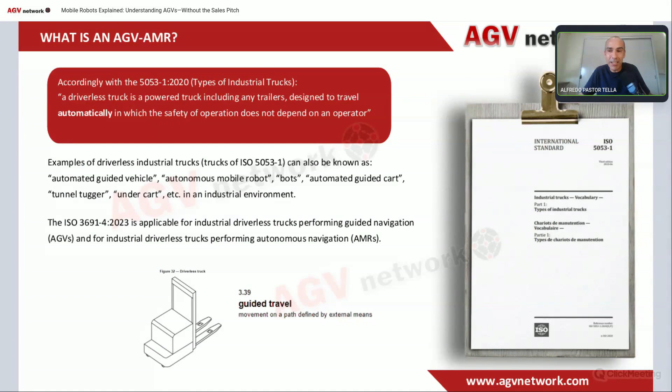Of course in the industry we say AMR is a fancier technology with autonomous behavior, whatever it is. I'm going to tell you my opinion, maybe you agree or not - it doesn't matter, because if you don't agree, just write me, tell me, and maybe you'll convince me. We are here for that, to speak about this and share some information.

So, mobile robot system - the first thing, when I go to a customer and they ask me 'I want a mobile robot, an AGV, or whatever, an AMR, whatever it is - how much is it?'

What are the things that we have to consider? There are three main things. The robots, the vehicles that are moving and performing the missions.

Physically moving pallets or whatever they move. We have a management system that is managing all the missions on the traffic, all the things we will see later on. And then we have a lot of peripherals, what I call peripherals, that are the charging stations, PLCs to communicate with the conveyor, for example, or HMI for giving missions to the robots from a manual point of view. There are many other things that are always in this mobile robot system ecosystem, and all of them are needed, not always, but are necessary to make the system work.

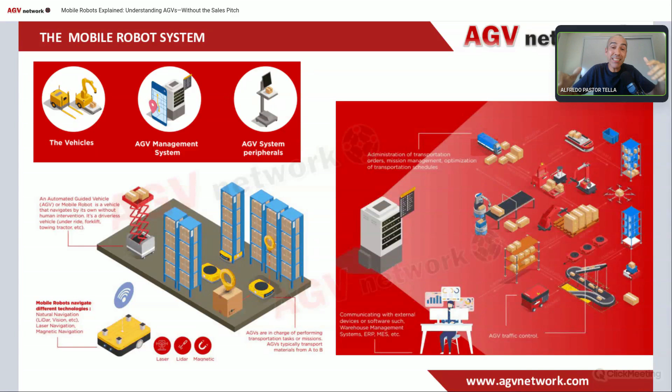So as you see, I'm staying very, very high level, very general, just to explain to you, as if you were my customer or someone that is looking for mobile robots for the very first time, what are the different things.

Let me talk about the first thing I want to talk about before talking about the types of mobile robots, the safety, and those things that are more complex.

What is the management system? The management system is typically a suite of software that we install in a host, in a computer, in a server, could be also a cloud system. So this is the brain, this software that is managing missions, the administration of transportation tasks, traffic, creating reports.

About the performance of the vehicles, it's creating alerts. You can see what the vehicles are doing, where they are. For doing this, you need some kind of graphical interface that is more or less developed by its supplier.

And then in the management system, we also have to consider the communication between the robots and the system, because typically it's via Wi-Fi with the antennas or other things. But this is more or less the main things that the management system does.

Very important, one of the main things that is taking more and more importance today is the integration with other systems in the factory or in the warehouse of the customer - ERP, WMS, conveyors, elevators, palletizers, whatever. We need to integrate our mobile robots.

The value that we are able to provide integrating mobile robots is higher if we are able to integrate with all these systems seamlessly, without problems.

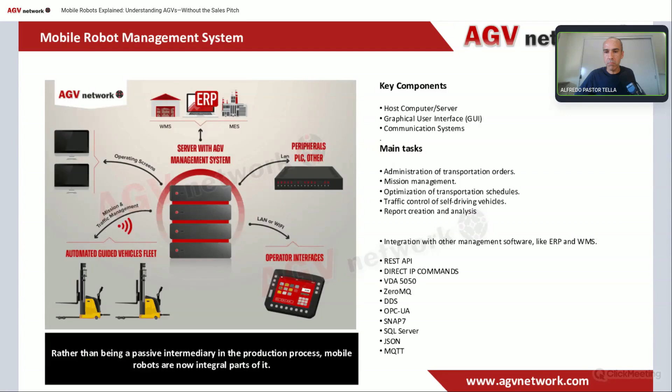What are the kinds of vehicles that we can find? We can find this kind of vehicles and this kind of vehicles. Typically, we have these categories of vehicles, which are the platforms, towing carts - it's like a platform - tuggers, tow tractors, and heavy-duty carriers. In fact, we have a lot of types, many other types. These are the more typical ones that we can see used in logistics and production.

Also for sure the forklifts, but for the forklifts I have another slide. If we come back to these vehicles, I could have a webinar about only platforms, about towing carts.

The platforms, they used to have some kind of lifting device, some kind of rollers, other things, to pick the pallets, pick the trolleys, pick whatever. Of course, each system, each customer will need one type of vehicle, because all of these vehicles have some pros and some cons, some advantages and disadvantages.

The towing cart is like a small tunnel tugger or tunnel AGV or mobile robot, that has a pin, takes a cart and goes into the lines.

Tuggers, okay, just like a small tow tractor. Then we have tow tractors with the possibility to have them in automatic mode or autonomous mode and in manual mode. And then we have this world of heavy-duty platforms that are mainly customized and could reach up to 150 tons, okay? It's very complex for me now to speak about prices.

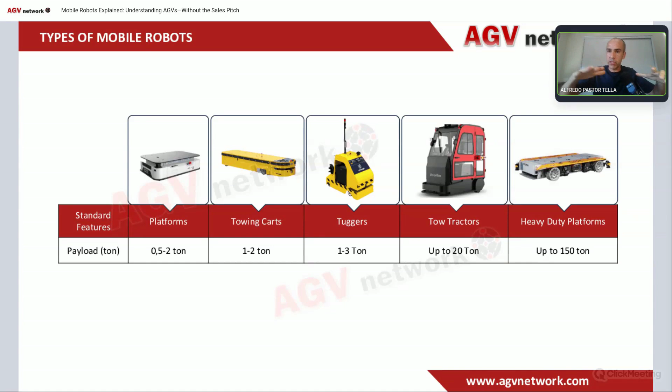This is a very easy vehicle because you can install it quite easily, since you do not need to adapt almost anything on your current flow. For example, with a kind of platform or towing cart, you should put some kind of docks to lift the pallet or whatever you are moving. With the pallet jack, it's easier.

Of course, there are other disadvantages compared to platforms. They are bigger, so the footprint is bigger, so you need more space to do the maneuvers. They are more complex to put under safety conditions because the shape is more complex, you need more devices and tools to make them safe. But this is a quite immediate vehicle to be implemented into a production site.

The stacker is the same as the pallet jack, but you have the capacity to lift it, typically up to 2.5 meters, more or less. And the counterbalance, well, you can arrive to 4 meters or even more.

Reach trucks is one of the kings of the warehouse. It's one of the vehicles that I really love because they are compact. They can move in aisles of around 3 meters, some suppliers even 2.9, 2.8, okay? And you can reach 9 meters, more or less, okay? There are also 14 meters depending on the supplier, but this is the average. Very narrow aisles of 1.6 meters, so very, very narrow. These are like mammoths, very big outside the aisles. They are a disaster because they are huge and slow, but in the aisles they are the king of going up and down and putting pallets on both sides, because you have the trilateral forks, or the telescopic forks to do it bilateral, both sides.

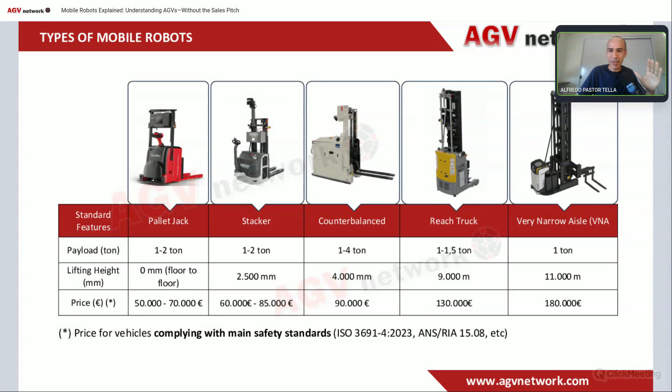Please slow down, Marty. Okay, I will try to speak slower. Sorry. That's good, that's good. I like that you tell me these things.

What are the main components, main subsystems that we can find in the vehicle? We have on average 5 systems, typically 5 systems. Maybe there's something more, but let's say about this one.

Navigation system: the system in charge of telling the mobile robot where it is and where it's going. We can have LiDAR navigation, 3D, 2D, magnetic system, visual, it doesn't matter. It's the software and devices used for identifying where the mobile robot is and where it's going.

The safety system is all the tools, devices that could be scanners, bumpers, radars, whatever, used for safety purposes, for avoiding running into people, or if that happens, making it as less harmful as possible. We have encoders, safety scanners, and the safety PLC. We will see all of this.

The power system is what puts the power into the vehicle, basically the batteries and some electronic stuff in the vehicle. We also have to consider the peripheral stuff needed, like online or offline charging, in-progress charging, wireless charging. I'll talk about this later.

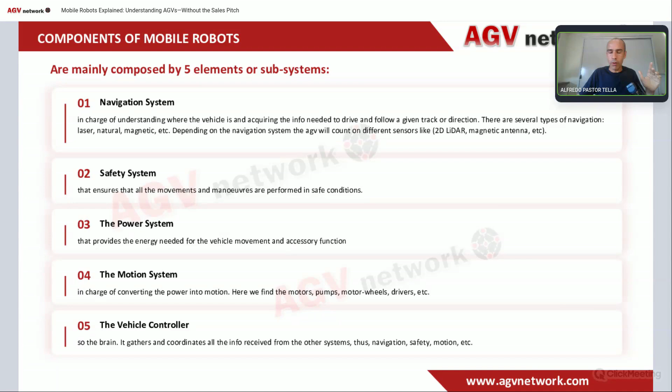Okay, let's go into navigation. We said the first thing, that AGVs have navigation systems. Today there are several types of navigation systems.

The main navigation systems that we can see in the business today are magnetic tape navigation, QR code navigation, laser triangulation (laser guided vehicles), and natural navigation. Natural could be SLAM, visual SLAM with LiDAR, 2D LiDAR, 3D LiDAR - it doesn't matter, it's natural SLAM.

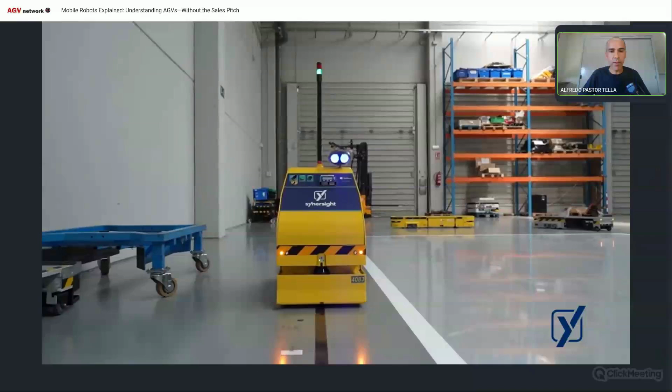So what is magnetic tape navigation? Let me show you a video. Magnetic tape navigation is a very easy kind of navigation where you take a magnetic tape, put it on the floor, and the vehicle just follows this track and does some actions, some tasks, at given points - that could be with tags or RFID, whatever. So this is the way it works.

It's very easy to install. It's complex in terms of a very complex installation with many curves, many picking and dropping positions, many things - it is time consuming. In other applications where the loop is not so complex, it's very easy because you can install 500 meters in just 1 hour, because everything is straight, going forward, and then some curves, etc. It's not so complex, even if people selling AMRs or natural navigation say it's very tricky. It's not so tricky, honestly, depending on the application of course.

What are the disadvantages? Of course there is maintenance on the track, because in my experience I have installed hundreds of kilometers, dozens of kilometers, and I can say that if you have a forklift turning on the strip, on the tape, maybe you have this problem. Otherwise there is no problem - you can wash the floor and no problem.

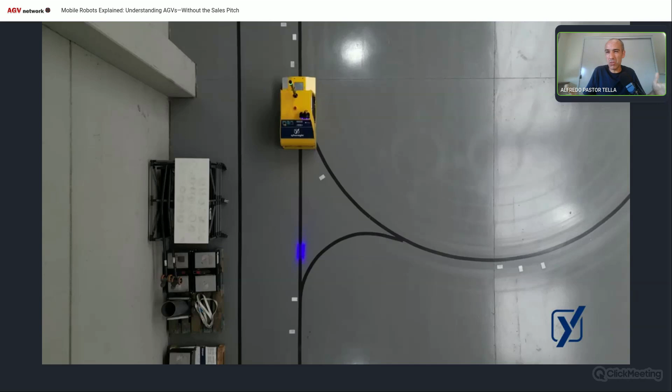So there is another problem, the cost of the tape - that is around $5 per meter. So it's not such a huge amount of money. Anyway, it has its own advantages and disadvantages.

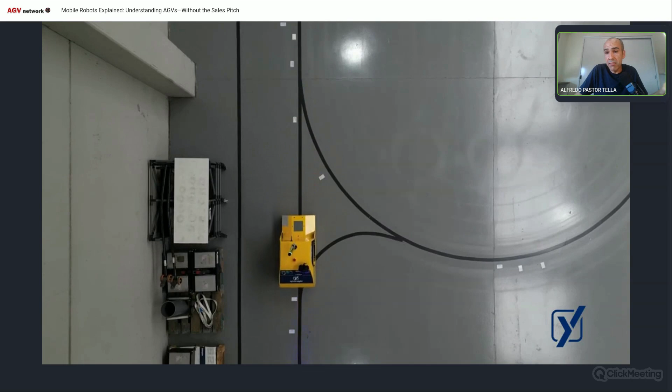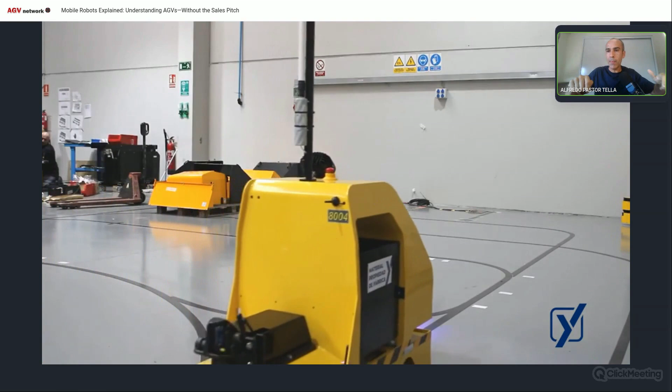One of the main advantages of course is the vehicle is relatively easy - there are no big brains inside, and that's cheaper, as we will see when we look at the cost of the vehicles. I will show you the difference between a mobile robot with natural navigation and a tow tractor like this with magnetic and with natural. There is a very important difference. Again, when we talk about natural navigation, I will tell you it's much more flexible, easy to install, easy to deploy, easy to then change the whole installation.

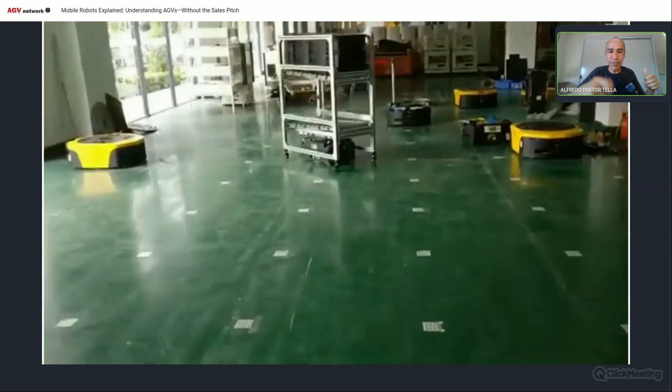Everything is true. QR code navigation: you put a grid of QR codes on the floor and give your vehicle all the missions, etc. In this case, the vehicle follows from one QR code to another, then turns and goes to another. It's the typical thing we see in e-commerce, for example - it's very used there. All these Amazon systems, likewise, many of them are using QR codes.

More or less the same problems that we have with the magnetic tape - you need some maintenance of these codes because they can get worn, torn. But they are also cheap to install, of course you have to install thousands of these. It's time consuming, not easy, but again the vehicles are much cheaper than with natural navigation.

Okay, so this is the codes. Let me see what is the next one, because I don't remember the video. You can see the vehicle is just moving 90 degrees from one QR code to the other. It's as I say, typical for the platforms.

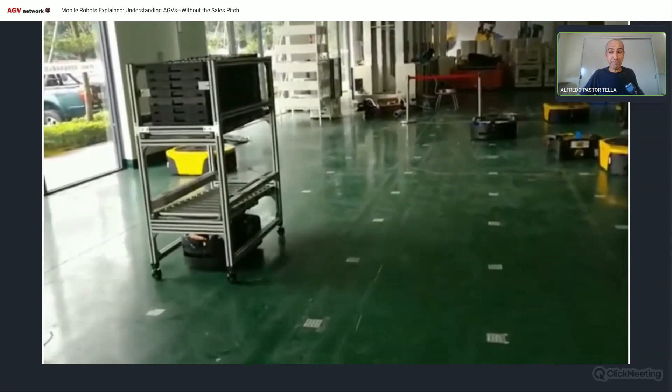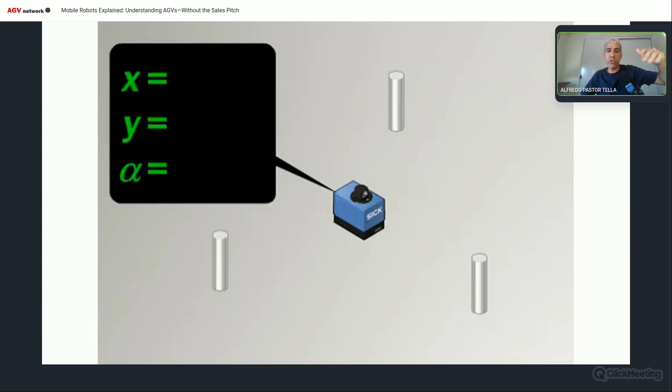Here is another one - laser-guided navigation with reflectors. So you put reflectors on the floor, or on the wall, wherever you need, and the vehicle makes this triangulation, calculates where it is depending on which reflectors it's seeing, so it knows the distance to at least three reflectors, the angle, and it knows where it is and where it's going.

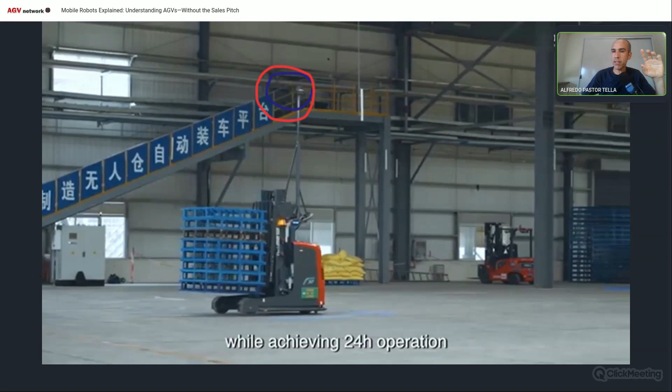For example, I have an application here, you can see this vehicle. Here you have the safety, the navigation laser, and it's targeting these things - this is a reflector, this is a reflector, this is a reflector, this is a reflector. So you need to put these reflectors. The installation is quite easy, honestly, depending also on how complex the system is, but it's not so complex.

It's very accurate, because we can reach tolerances of up to plus minus 1 millimeter for the best systems. And from an economical point of view, all the things you need to make these laser-guided vehicles work is more or less what you need for the AMR.

They are more complex to change, if you want to change the layout, the tracks, the missions. Maybe it's more complex compared to natural navigation, but it's more accurate. Someone from AMR or natural navigation might tell me theirs is 1 or 2 millimeters, but the average is around 10 millimeters. So it's 10 millimeters of accuracy compared to 1 or 2.

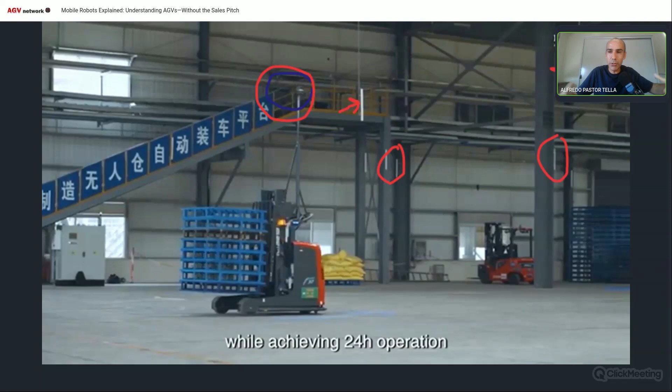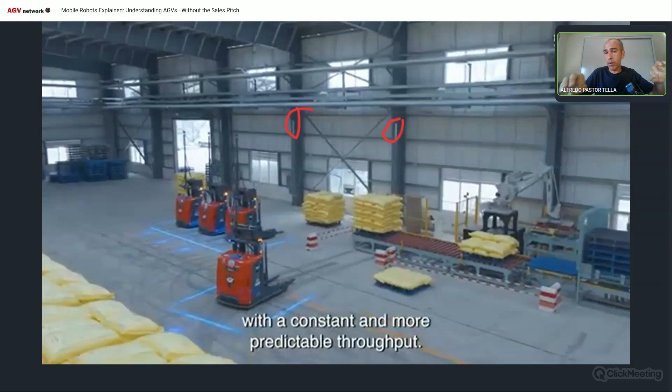Okay, so I have to remove this. Again, like here, you see the reflector. But it's quite easy to install because everything is done during the project, it's on the computer. When you arrive, you just have to put the reflectors and make a calibration of the system. That's all.

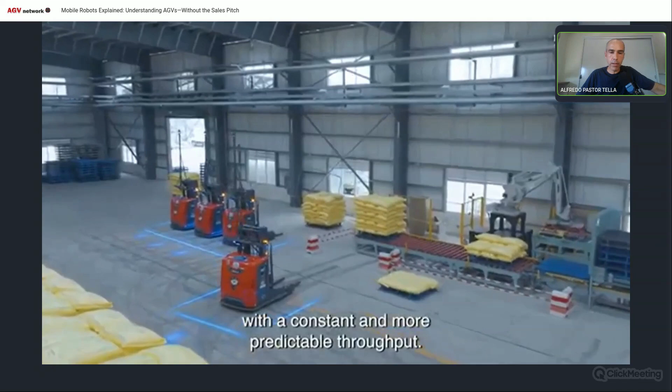After this, this is the laser navigation, as I was saying. What is the next one? Natural navigation, please. I like this. This is natural navigation, now we are going to talk about natural navigation.

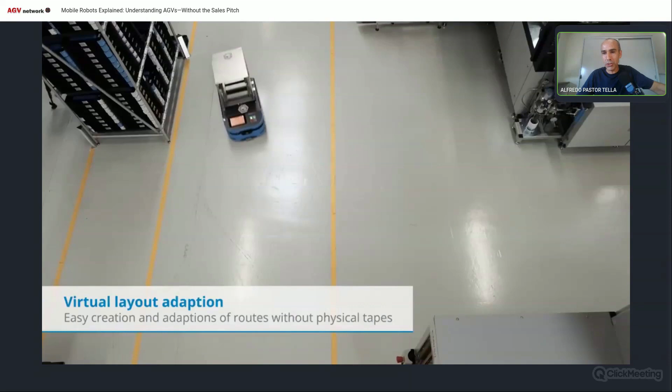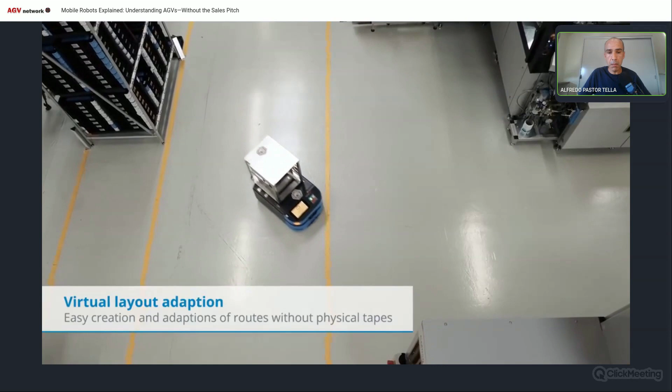In this case we have these videos. You can see this vehicle moving in the factory. As you can see, there are no references, no tape on the floor, no reflectors. What it's doing is simply watching the environment, creating a map of the environment, and localizing itself in that map, then navigating in it. That simple and that complex, very complex.

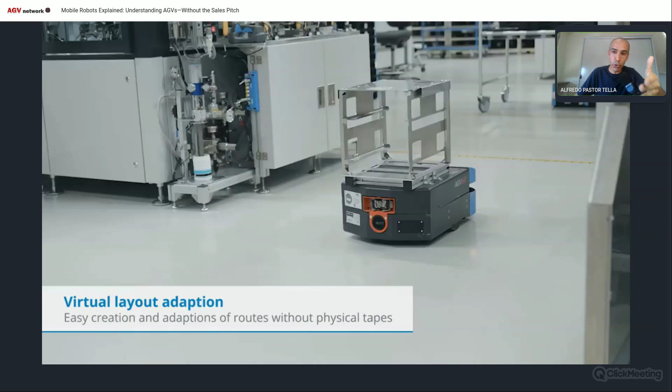This is the concept, what we call natural navigation. Under natural navigation we have a lot of technologies, the sensors, the algorithms managing all these things. Each supplier is different, so choose the right supplier. So as I said, the vehicle is moving, creating a map.

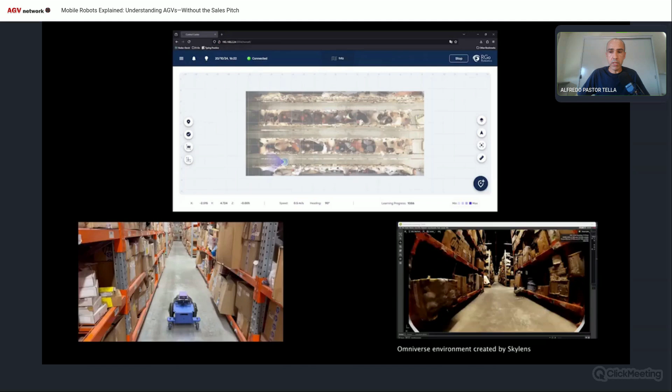These red points are what the vehicle is seeing, this is the way it knows where it is. This is another kind of natural navigation, but using visual, so cameras. The concept is the same, it's just creating a map with the cameras instead of the 2D or 3D LiDAR.

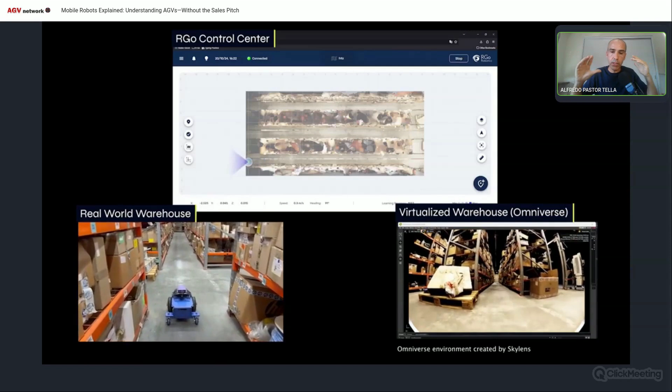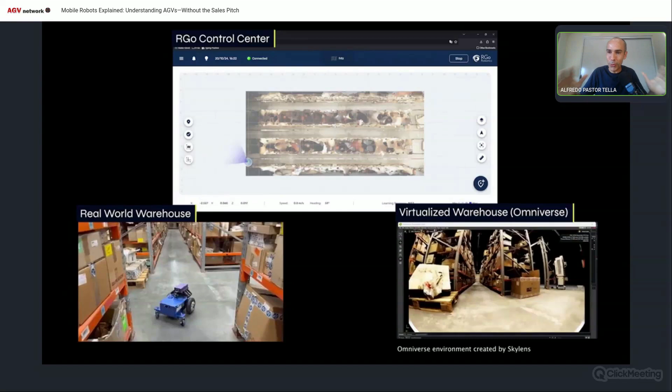It gives more data because a camera gives more data. It has other drawbacks like light conditions or other things, or the computing capacity needed to manage all this information. So, as I said, there is no worst or best. Think about what you need.

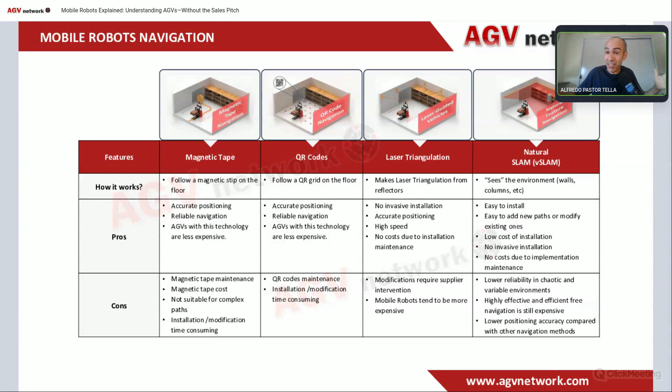Now this is the never-ending debate: what is an AGV, what is an AMR? This is my opinion, okay, but if you do not agree, just let me know. For me, it doesn't depend on the navigation. You could have an AGV or an AMR with different navigation systems.

The only thing that makes an AMR so autonomous, the only difference for me, is that it's autonomous. The vehicle decides where to go, so it's not following a track. This track could be virtual or physical. You could have programmed your system with all the tracks from a virtual point of view.

You could have navigation which is SLAM, visual SLAM, laser triangulation, whatever it is, virtual. But if your vehicle is following a line, it's an AGV for me. I call them mobile robots anyway, but okay, that's AGV for me. If your vehicle is able to decide the path on its own, that's an AMR.

For doing that, of course, you cannot do it with magnetic tape or QR code. You need to have natural navigation. Then, what kind of natural navigation? Again, that's a discussion we could have together. But AMR is only if it's able to autonomously decide what to do. Otherwise, for me, it's AGV. Let's call them mobile robots.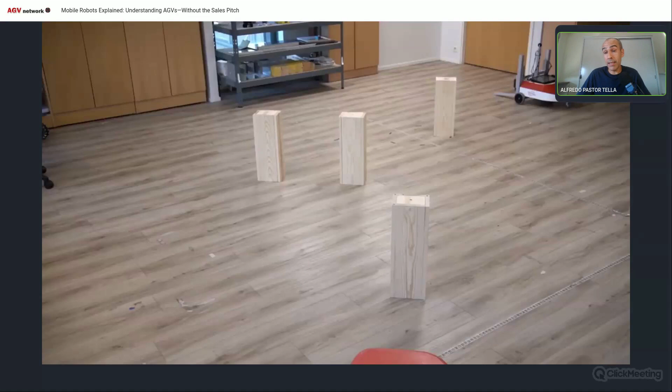Let me show you another video about obstacle avoidance, which of course AMRs have the capacity to do. And again, I'm not going to say if this is good or not, it depends on the project. In some brownfield projects with small vehicles, or with very well designed vehicles from the safety point of view, you could have obstacle avoidance. Other times it's risky.

Depends on your supplier, on your project. I'm sorry, I'm not saying you anything, I'm just saying it depends. But it's true, it depends.

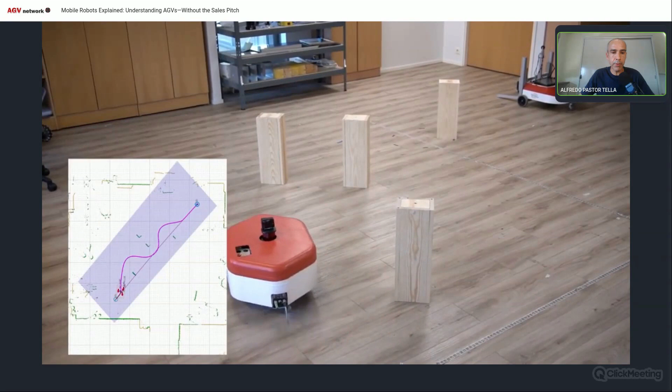Look, this is an example of autonomous behavior from Navitec. In this case, can you see... here it is, in red, okay. Here, the vehicle is seeing this obstacle. Then here it's seeing this obstacle. Here it's seeing this obstacle, and the other one is here. This is another obstacle, okay, the other obstacle.

So what is the vehicle doing? It has to go from here to here, straightforward, but there were obstacles. So what is it doing? The vehicle is just deciding where to go, and it's deciding depending on what is seen in that specific moment. So it's autonomously able to decide what to do.

This is an AMR for me, not because of the navigation. It could have a visual system, it could have SLAM, it could have 3D LiDAR, 2D LiDAR, it doesn't matter. You cannot give me a magnetic tape navigation that is free to go wherever it goes. Sorry, it's not possible.

So the vehicle is just correcting, is just deciding where to go. For example, it cannot go here because there isn't enough space. Maybe it's deciding to go here because it's the fastest way to reach this point, which is the destination. In any case, it's deciding by its own what to do.

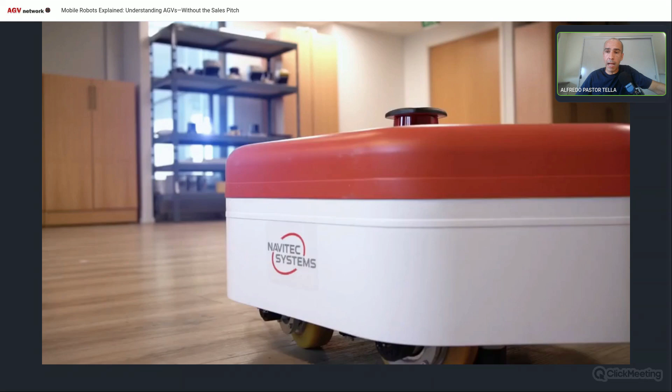This has nothing to do with safety, okay? It's just navigation. Safety is not under the natural or autonomous behavior, because safety is a system apart from the navigation. Let me check the presentation, okay, let's go ahead.

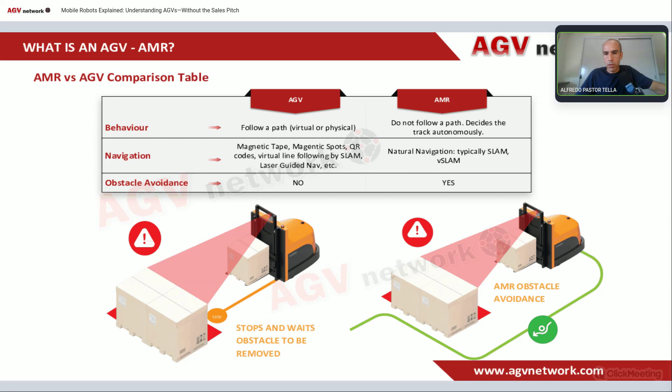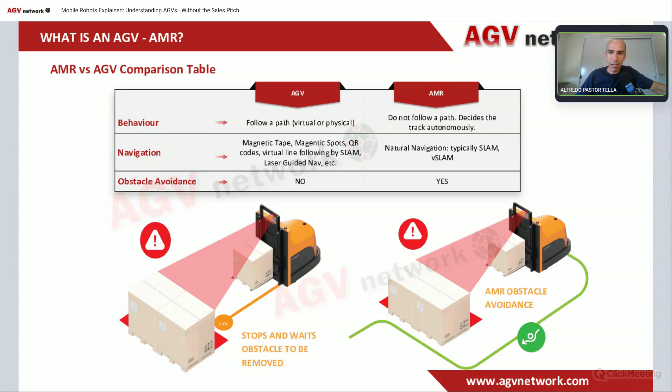Do you agree with me or not? Excuse me, because magnetic tape, yes. Okay, well, I don't see people saying that I'm not right, so that's fine.

Okay, this is one of the main slides I wanted to show you. There is not a best navigation technology, as I told you, there is not a best navigation technology. You will have a best navigation supplier, because all the suppliers could use the same sensors. Of course, choose suppliers with premium brand sensors for navigation.

But each supplier has its own algorithm, its own way to manage all the data it's receiving from the environment, from the sensors. So you have to check what your supplier is doing. Do not follow a technology. Do not follow wanting to have a SLAM system, I don't know—follow the supplier.

Go verify that the navigation is working in hard and harsh environments. The supplier has a good proven track record of successful projects, and that's the way to choose the supplier and the navigation. The capacity of suppliers to manage this data is not the same, but everyone is doing different things—the behavior of different suppliers is completely different with the same structure of devices, tools and sensors. So this is the one advice I have to give you.

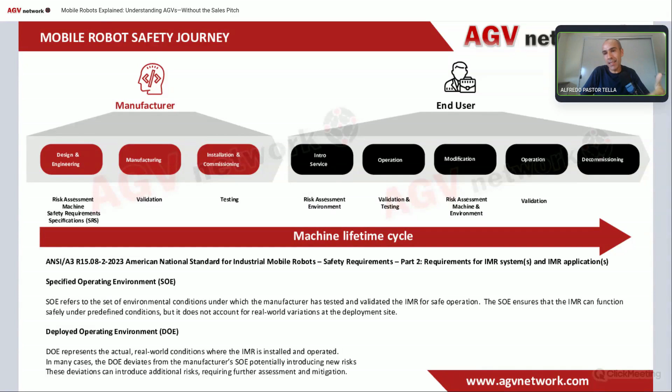So what are the main standards that we see today in the mobile robot business? There are quite two worlds, in the States...

Mainly, all the mobile robots are following, for example, the B11.0 for risk assessment, or the ANSI RIA R15.08 for industrial mobile robots, or the B56.5 for automatic guided vehicles. This is the differentiation in the States. But in any case, if you're in the States buying a mobile robot, buy with these specifications.

In Europe, we have the machinery directive that's going to become the machinery regulation in 2027, and we're following more the ISO standard, so the 3691-4:2023 that is now under review.

Why is it important to buy mobile robots with this standard? For example, in this specific case, the ISO 3691-4, because the 3691 is a C-type standard, specifically designed for mobile robots. I call them mobile robots - it's taking the whole vehicle into consideration.

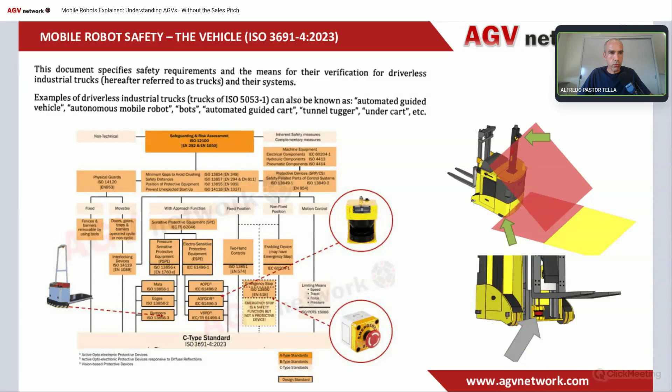How does the mobile robot system work? In the mobile robot we have safety scanner, safety encoder, safety PLC - many safety things that are safety rated. It means if a device is safety rated, it gives you a certain probability of failure.

If it is safety rated with a PLD, for example, it's telling you the possibility of failure is very low over, I don't remember, 10 years - you can check in Google. So the point is that all these standards are saying how the safety rating of each component should be.

The braking, the scanner, the bumper, the relay, the encoder, the PLC - it's very important that there is a safety chain that must be respected. It starts, for example, this scanner detecting a person, giving safely the information to the PLC, that is safely stopping the vehicle. All this has to be done in a safety loop.

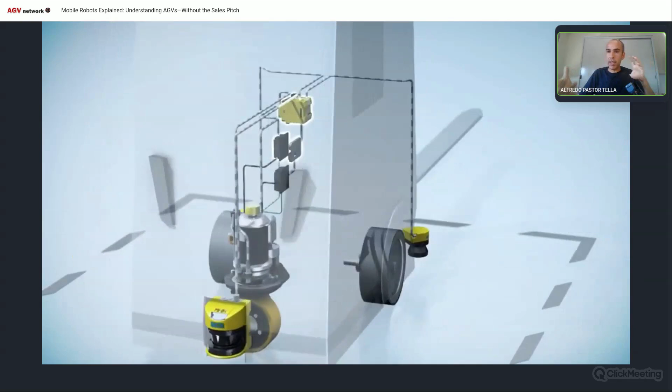Very important - check this when you're buying a mobile robot. This is a wide explanation: the safety encoder gives you the turning position of the vehicle, the speed of the vehicle, so you can program the laser scanner longer or shorter, depending on speed, depending on load. This is done by the book.

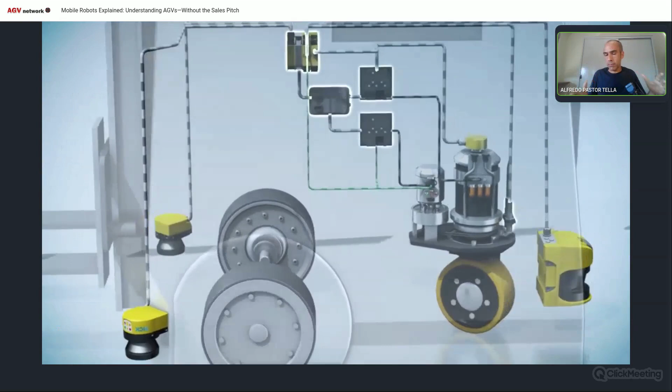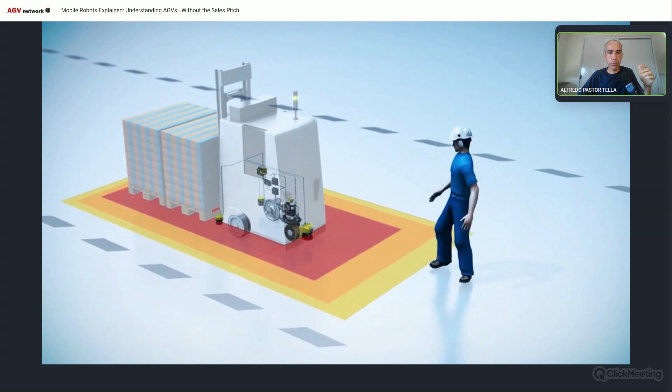Typically we have 2 or 3 safety fields that we call warning field - excuse me, guys, stop, okay, warning. It means the vehicle is detecting someone or something, is slowing down, and then we go into the red zone, which is stopping the vehicle.

The red zone is the only one considered in the standard. The other things just allow the vehicle to slow down, which is fine, but the red zone is the only thing you have to check - it's the only one considered in the standard, that's all. So the vehicle has to stop before touching anyone.

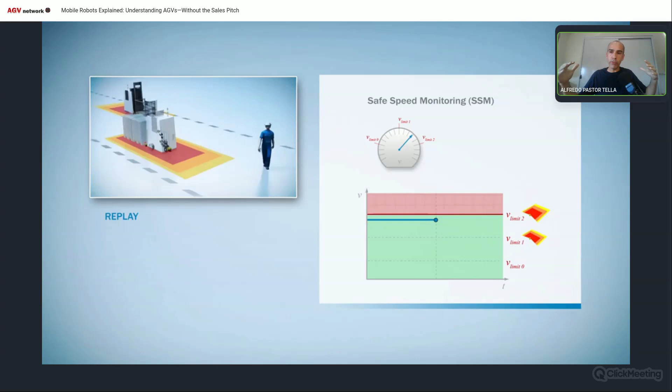The safety scanners - you can have several safety scanners because you should cover all the movement of the vehicle, so when it's turning, going forward, going backwards. For doing this, the safety scanners can be configured with different shapes.

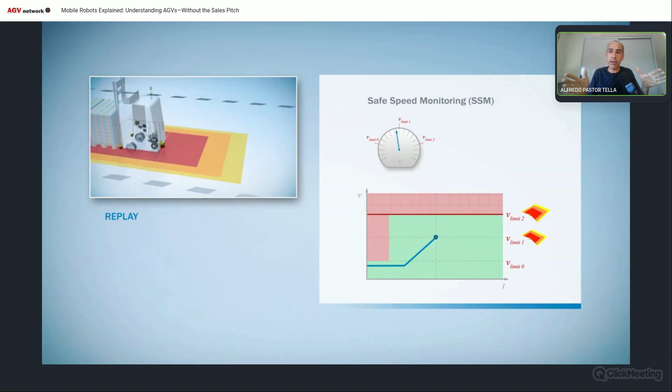You can have a look, here it is, perfect. In this case, for example, it's turning, so it's opening this side of the safety, changing the shape of the safety range to detect if there is someone or something.

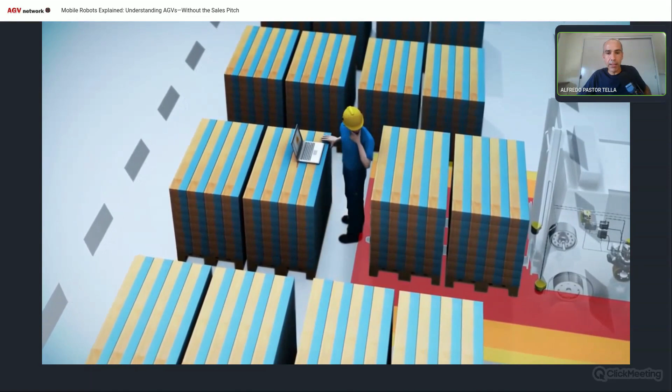In this case, there is a guy there. I don't know why he did not realize there is a vehicle going to it, but in any case, the safety scanner is detecting the person, so it stops. Very simple, of course, there is a huge amount of information behind this that we could discuss for hours and hours.

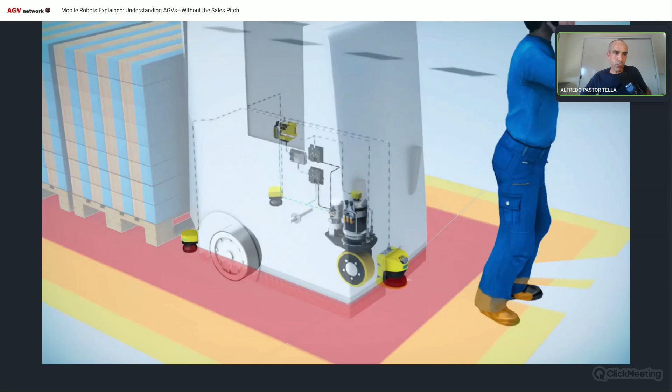Okay, let's come back to the presentation. Okay, where I am. I talked about the vehicle. The environment is not less important, it's important the same, because you have your vehicle, as I told you, but it's not said that you are installing it in a proper way.

For doing this, there are also the standards. The standards in this case are giving guidelines of how to install mobile robots. For example, the 3691 has identified several zones of operation for mobile robots, depending on factors like the speed of the vehicle, the presence of safety scanner, the presence of emergency button, the presence of clearances, the space between the person and the fixed structure.

So when there is some kind of pinch point, these distances, these clearances, these gaps, we could identify different types of operating zones. We could have operating zones, so no risk or lower risk, let's say - the vehicle maybe could run faster because it's open, you cannot pinch anyone. Maybe we have operating hazard zones, so more restricted areas, restricted zones, confined zones, and low clearance zones.

Just to give you an idea, because I cannot go into detail of each of them, what it's saying is written in the standard. An operating hazard zone is a zone, for example, of inadequate clearance, and you have to design it operating hazard zone. What does it mean?

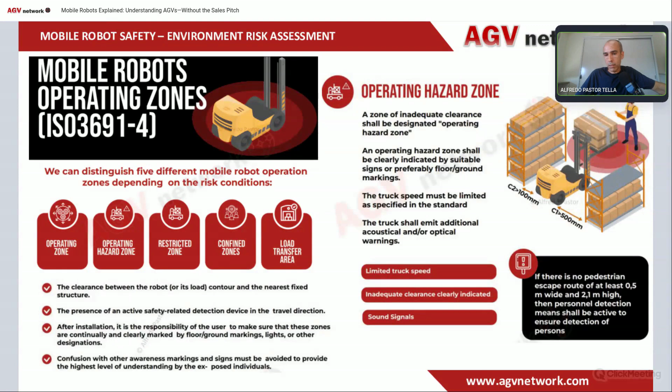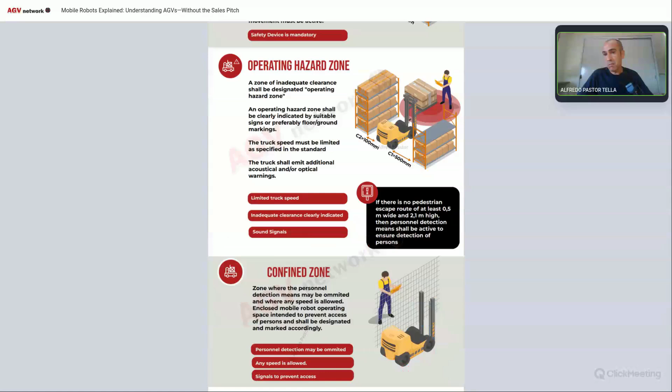But well, I'll show you this, one second. This, for example, I have created a kind of infographic explaining what are the different types of zones - confined zone, restricted zone. You can download it then on AGV Network, I will show you how.

Come back to the presentation. Sorry, but I have a lot of things to say, as you can see. It's very hard, but let's make a summary of safety, okay?

First thing that I have to tell you - if you are an end user, if you are an integrator, if you are a manufacturer, even more - buy and understand the standards. You have to buy them, go to the ISO online shop or the ANSI or the A3 or whatever, buy them, read them, understand them. If you don't understand them, ask people that understand it. You have to understand them because it's very important. If you are the end user or the integrator, you are in any case liable at a given point, responsible, let's say. Always do environmental risk assessment, okay?

You cannot put a mobile robot into operation without an environmental risk assessment following B11.0 or 12100, whatever standard you use, but you have to do this environmental risk assessment. And very important: communication between people. All the stakeholders, maintenance people, operators in the factory, integrators, even the people cleaning the floor, must know there is an automated vehicle, how it behaves, what the safety measures are, everything. So communication is a must. It's very important. We should avoid many problems if we just communicate properly between all the stakeholders.

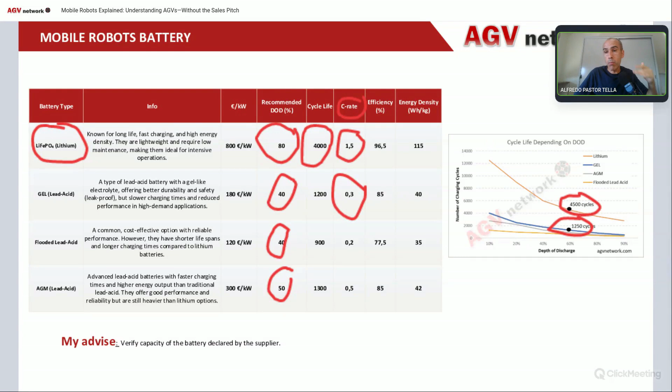So today we know we go into offline charging, opportunity charging, in-process charging. This is why, because you need to improve the availability of the vehicle, and this is why lithium is taking more and more importance in the business. But I'll show you, in some cases maybe you do not need lithium, depending on your project.

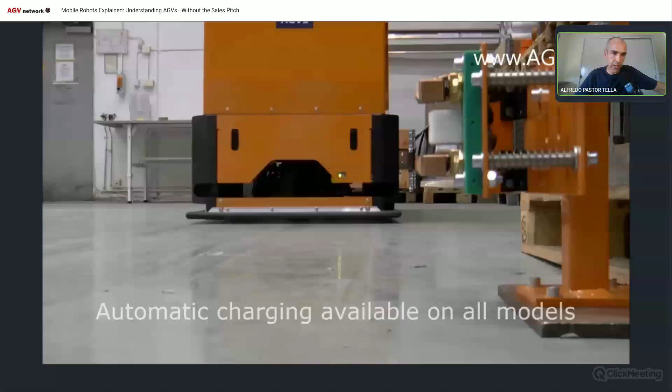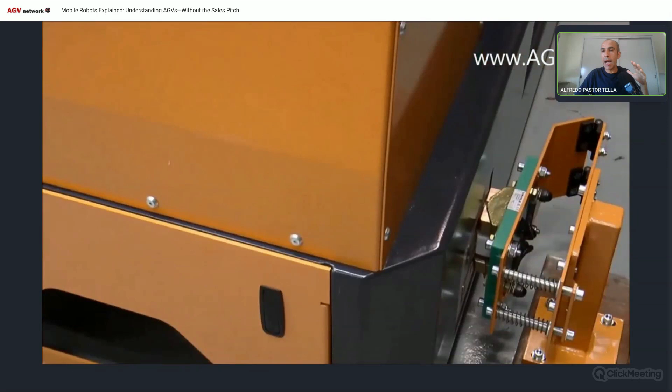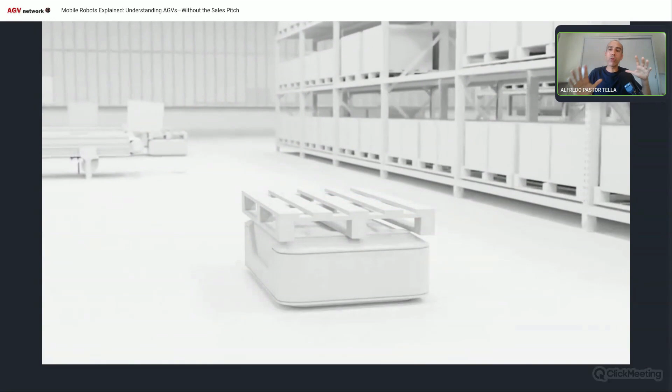I'll show you a video, okay, battery charging. For example, this is what we call offline charging. The vehicle is doing charging by its own, whenever it has idle time. So it has no missions and it goes to the charging position, does the charging, etc. It can be done with wireless charging or contact charging, it doesn't matter, but it's out of the process. The vehicle goes by itself, so the operator doesn't need to take care about it, but the vehicle has to be free.

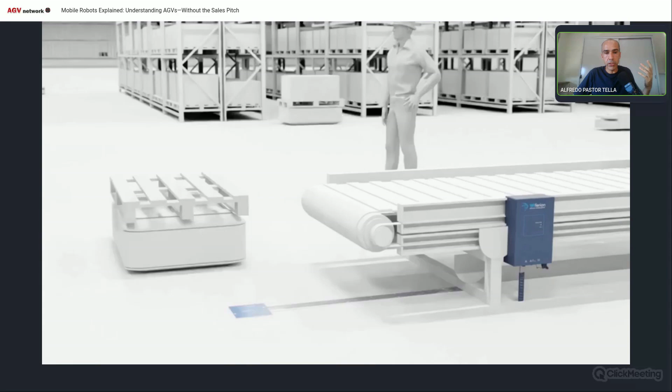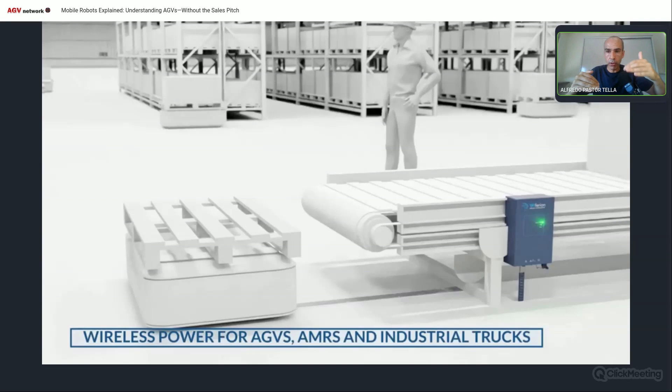On the other hand, we have another technology, which is in-process charging, so the vehicle is doing the charging within the process of the mission. In this case, for example, the AGV or mobile robot has to go to a conveyor, and there is the charging station there. In this case it's wireless charging - it's a video from Wiferion, performing this charging. Why am I showing this? Because in this kind of process, wireless charging is faster because you don't need to wait for the contacts to touch, so the flow of energy is immediate, and the charging is much faster. So the AGV, the mobile robot, is charging in the process.

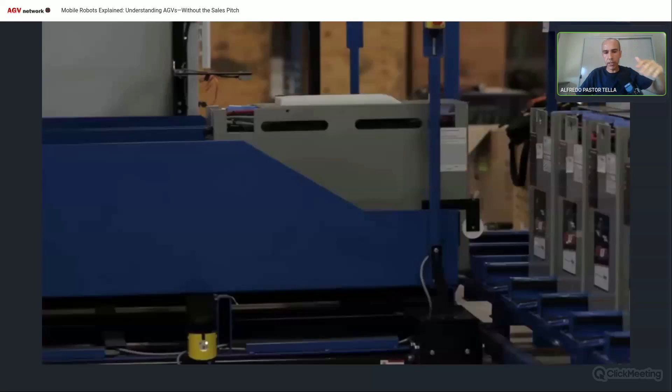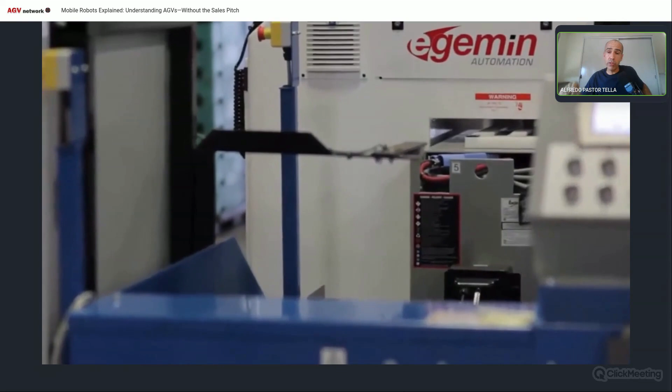You can see in this case it's wireless, so there are two coils, and it's done by induction. There are other technologies, like battery exchange, but it's very expensive if it's automatic, because this kind of device costs more than a vehicle. But it's very interesting because if you have the payback on that, the important thing is that your vehicle will always have time to work, because the battery exchange needs around 2-3 minutes, and then you have maybe one shift of work for the vehicle that never needs to stop. So you have to think about the battery - it will work, and you have almost 100% availability of the vehicle.

Of course, you need a second battery, you need the charging station, you need the exchanging machine. You can also do the battery swap manually, but of course you need a person, you need to factor in the labor cost, and then it depends on the project. What other solution do we have?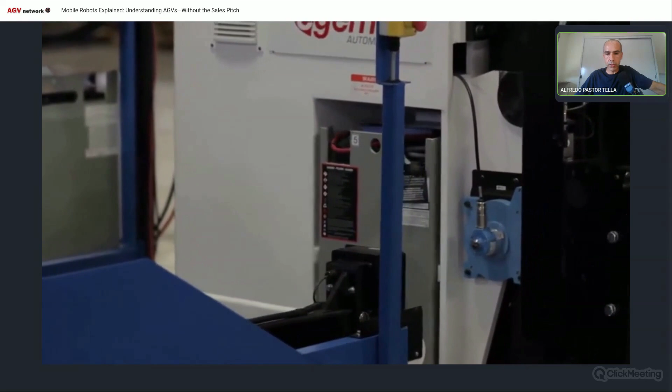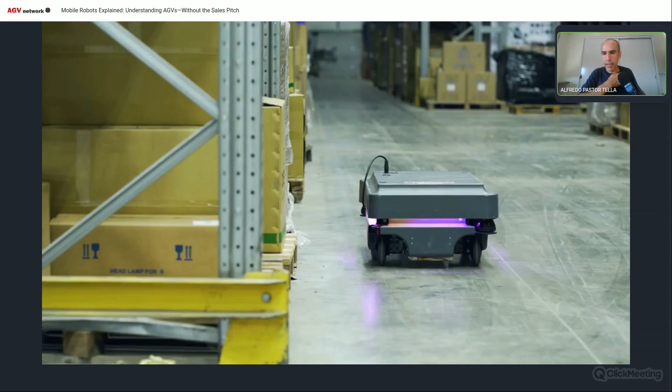Yeah, okay, this is changing the battery. I wanted to show you this because it's a new technology, from AGB - a company that is producing in-motion charging. There is a mat on the floor, and the vehicle goes on that floor and is charging while it's moving. It's a step forward from in-process charging - another way, of course it's not for all flows, not for all vehicles, but it's another possibility. You can see there the vehicle performing this charging while it is moving, which is quite innovative.

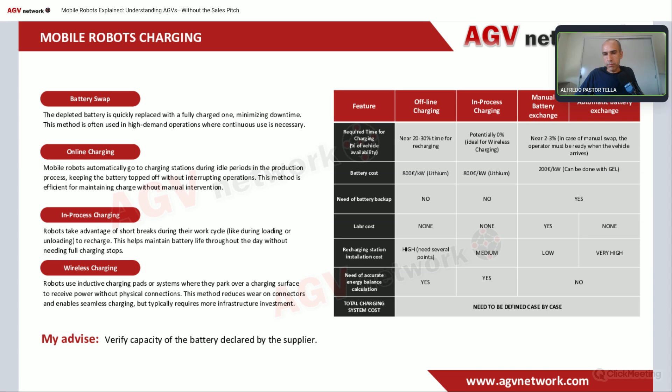There are - well, avoiding mistakes, improving traceability, more safety, better ergonomics, because if the vehicle is going into a cold condition, otherwise you'd have a person going into the cold area. Vehicles also last longer because they run smooth. There are a lot of indirect costs that are very complex to evaluate in a spreadsheet.

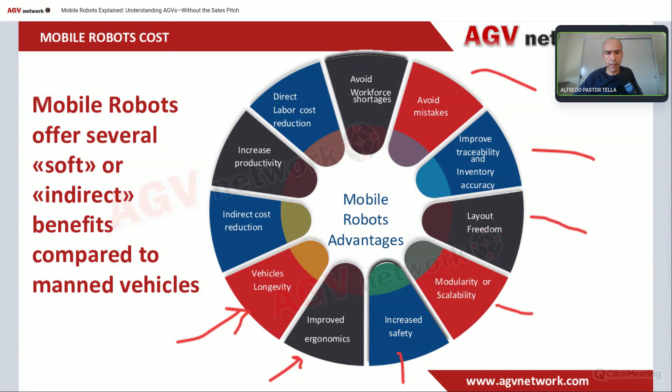If we compare the direct costs of manual forklifts versus automated or autonomous forklifts, in the manual case you have the salary of the driver. The number of shifts is very important because it determines the number of persons needed, and so the labor cost, the number of vehicles, and the maintenance.

If we look at the direct cost of mobile robots, the AGV vehicle is higher than the manual vehicle, that's clear. The number of vehicles also tends to be higher than with manual vehicles, because like it or not, they are typically slower. There is the management software, this 'brain' I told you about, that has a cost. Installation and commissioning is another cost, and the maintenance is more or less the same as manual vehicles.

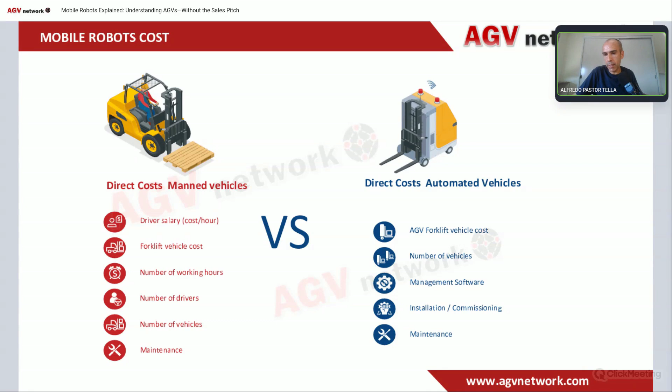So what are the main cost drivers in a mobile robot project? The number and type of vehicles, the characteristics of the vehicles, installation and commissioning cost - everything that is labor cost, like the engineer who goes there to program the vehicle and run tests. The maintenance, the software cost - this brain has a cost depending on the supplier and the complexity of the system - and other additional costs like transportation, training, and documentation, which I will show you.

If we look at the cost of the vehicles, it depends on the type - the forklift, the tugger, the platform each have different costs. Typically the main drivers are the payload. If we have a lifting device like a forklift, also the lifting capacity and the battery - the lithium battery has a cost, other types of batteries have another cost - this is for the initial investment, because if you consider the total cost of ownership, the cost may change.

And the navigation method also affects the cost, depending on the vehicle. The number of vehicles is also a cost factor, because the number of mobile robots needed is typically higher than with manual forklifts. If you take a manual forklift system with 2 vehicles, you probably need 3 automated guided vehicles. The average is 1.5 automated forklifts compared to manual. If you have 10 manual vehicles, you'll need 13 to 15 automated guided vehicles - that's the rule, more or less.

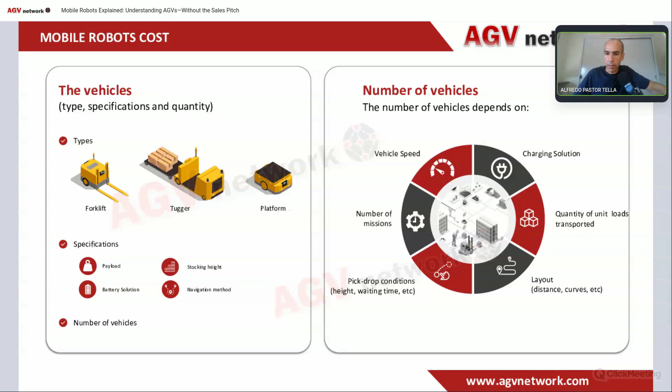If we look at the cost of the mobile robots - a pallet jack is around 60,000 euros, or 40 to 50 depending on the supplier and the safety features. The forklift is around 90,000, reach trucks around 110,000, and very narrow aisle vehicles around 180,000, more or less. It depends on the payload and the stacking height, not on the navigation, because whether it's autonomous or automated doesn't matter - the sensors are the same, the programming capacity is the same.

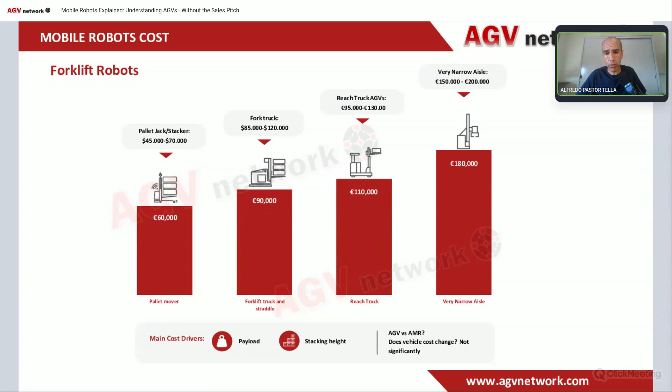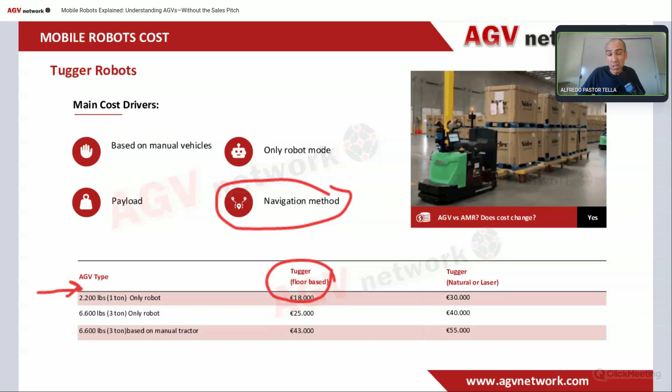If we're talking about tow tractors, the navigation method is important here, because you can have a 1-ton tow tractor with magnetic navigation for around 18,000 to 20,000 euros. With natural navigation, it's around 30,000 euros, more or less.

Of course, installing natural navigation will be much easier, lower cost. So at the end of the day, you have to check the total cost of the system, not of the vehicle. You have a 10,000 euro difference here, and with 10 vehicles, that's 100,000 euro difference between the two systems. Is this cost compensating for the lack of flexibility and the installation cost? Yes or no? I don't know, it depends on your project.

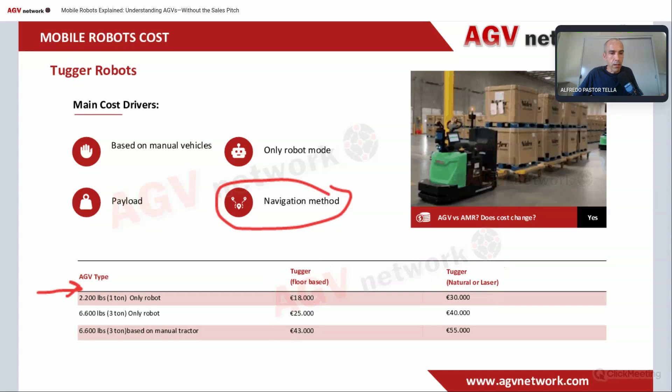What else? Platforms, tow tractor platforms. Again, depending on the kinematics of the platform, if it's unidirectional or bidirectional, that affects the cost of the vehicles. Here again you have magnetic tape navigation. The vehicle, if unidirectional, maybe costs 14, 15, 16,000 euros. If it's natural navigation, which you need, you need more sensors, more capacity, so the vehicle is more expensive. But it's easier to install, more flexible, more advanced. It depends on what your needs are.

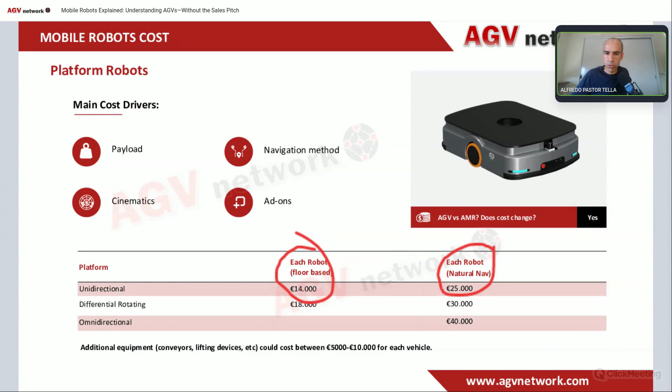What are your needs? So if we talk about the software of the system, what is the cost? This is completely different from supplier to supplier and project to project. You can spend nothing if it's a very simple system going from A to B, or you can spend up to 100,000 or 150,000 euros if you're implementing communication protocols with a WMS, installing a WMS, or if you have a huge amount of pick and drop positions that need programming with all the conditions and traffic logic. It depends on the complexity. On average, you can expect to spend 20 to 40,000 euros.

Installation and commissioning: this is all the cost for the people in the factory installing the vehicles. It depends on the number of vehicles, the complexity of the installation, and the integration with other systems. It also depends on the navigation type, because with natural navigation pallet jacks or tow tractors, you just drive into the environment, map it, and it's done. With magnetic tape, you have to install the tape, and if it's a complex circuit, maybe that doesn't compensate for the cost difference.

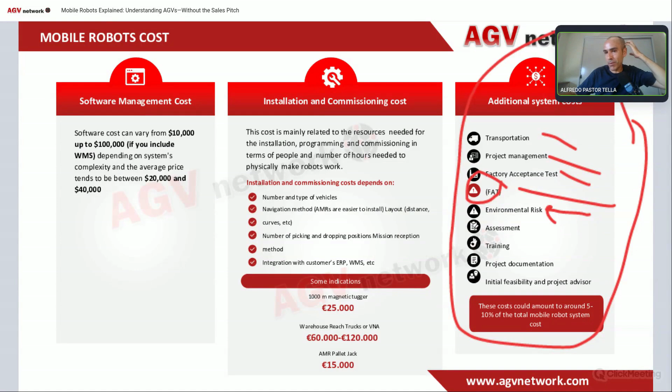And then there are a lot of other costs that we suppliers of mobile robots love to charge for: transportation, project management, factory acceptance test, environmental risk assessment - as I told you, you have to do it, but you have to pay for that too. Training, project documentation, advisory - there are even suppliers that ask for money just to give you a price. So everybody's different, ask your supplier, because all these numbers I've given you are completely different from supplier to supplier, and the world is wonderful because it's full of different people.